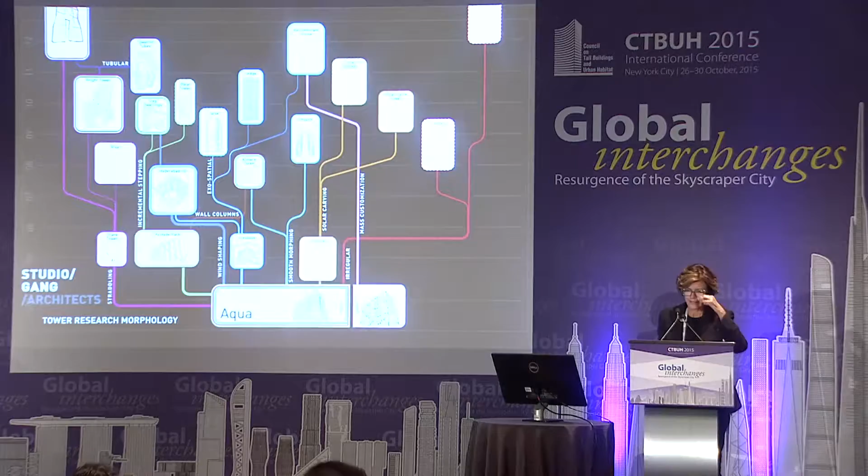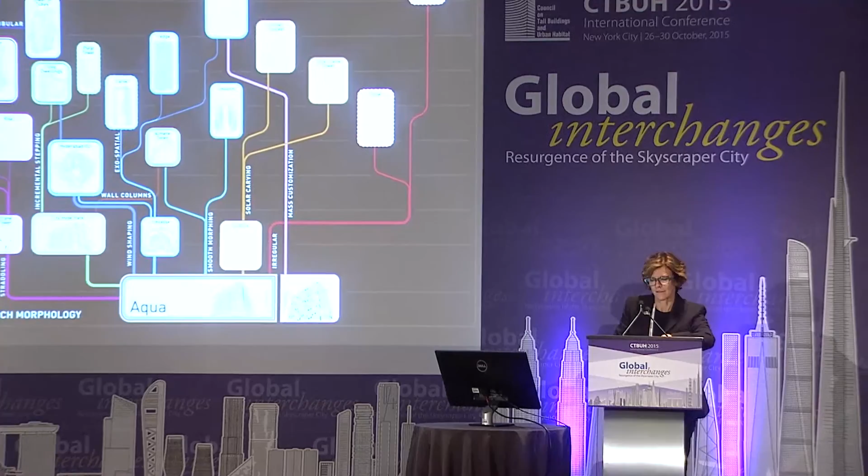Go figure, okay? So I'm Jeanne Gang. I founded Studio Gang Architects in 1997, and I've been working on tall buildings since about 2004. We've been using this human-centered approach to tall buildings, and even though, as we have learned through this conference so far, that tall buildings are more and more accepted, and they're appreciated for their iconic nature and their identity that they lend to cities, they still have some ways to go with the social connectivity.

And so I'm talking about residential buildings today, tall residential buildings. Problems continue to persist with the buildings at ground level, through the accessibility and creating community with these buildings, as well as their environmental impact.

So when we started working on tall buildings in 2004, we noticed that there were these kinds of lines of ideas that were tying our approach together. So I'm only going to talk about 3 of those today, 3 strategies for making the building more socially connected.

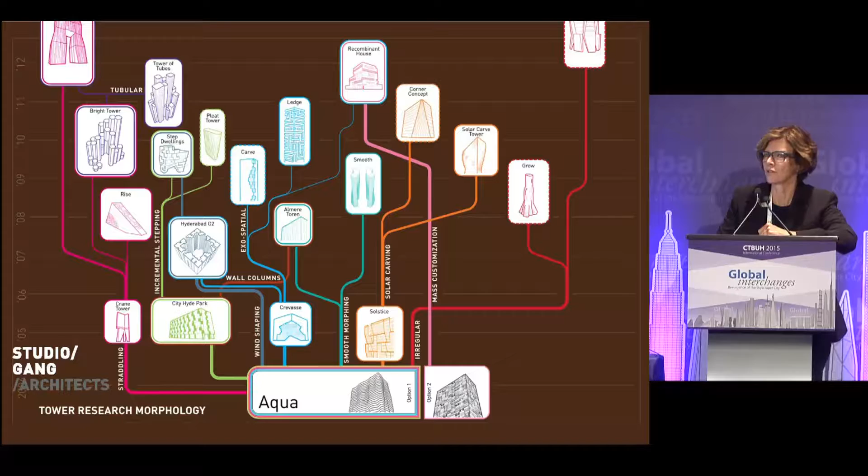The first one is called exospatial, so the living on the outside of the building. The second one is called solar carving, which is making the building respond to the urban environment around it and not just the environment of the building itself. And the third one is called bridging, or in this diagram, straddling, the idea of making space at ground level for social connectivity.

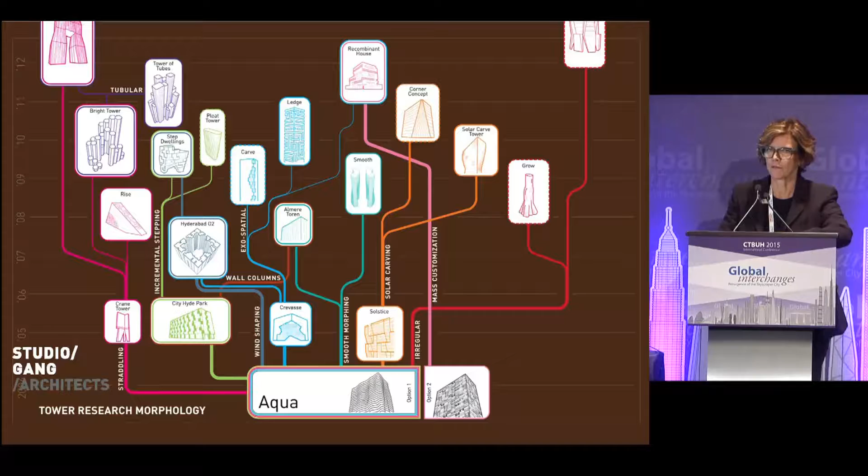Probably most people know the Aqua Tower. That is a great example of what I call exospatial design. So we're exploring here the idea of outdoor living and its potential for its social dimensions on the outside of the building. And when we first designed this building, it was very rare to have balconies as high up as 82 stories, which this building is.

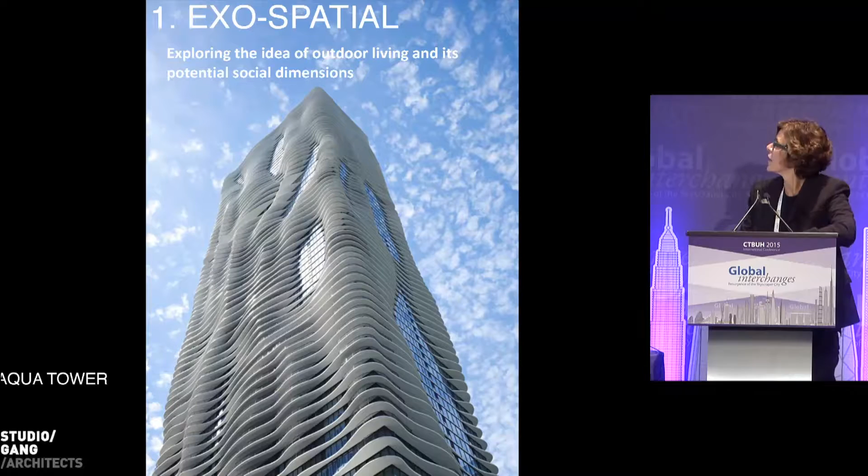It's a mixed-use building with a hotel at the ground level, and then rental apartments up till level 57, and then condominiums above that. So mixed use, and all of these 3 uses share common amenities.

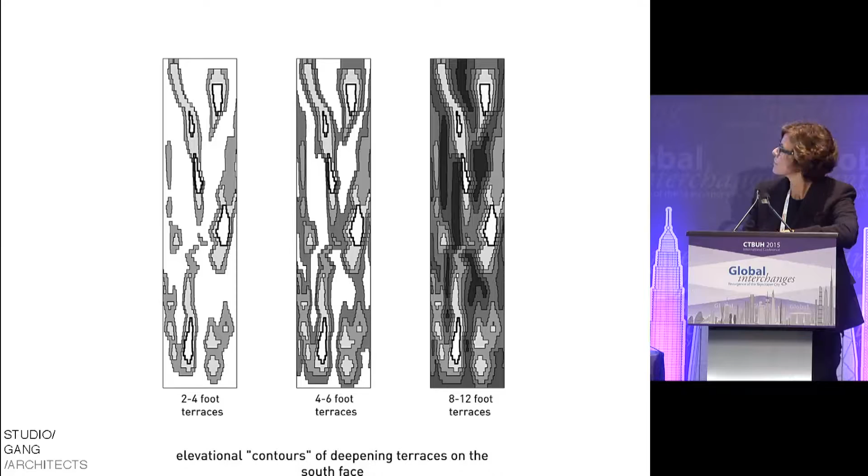But the balcony, which is the exospatial part, is based on this idea that there could be terraces, almost like a landscape of terraces on the outside of the building that have different depths, different dimensions, and they relate to different parts of the city. So every floor is slightly different in this building.

We were able to achieve this even with the construction, with a 3-day pour cycle. So it was completed in 2009, and it was probably lucky to be completed right before the downturn of the economy, but has been a huge success in Chicago and is a highly coveted place to live.

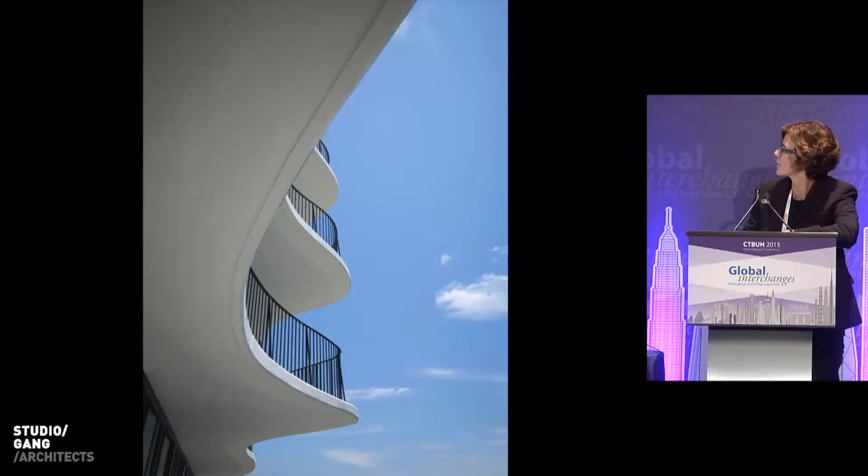The idea of the balconies really was, because the slabs are changing on every level, it's possible to see people with oblique views up and down the building and across the way. And they provide, some of the deepest terraces are 12 feet or 4 meters in depth, and they allow people to inhabit this outside space.

These balconies, because they're different shapes, also confuse the wind, and so we were able to achieve this building with MKA engineers without a mass-tuned damper. But the idea is this connectivity exists on the outside face of the building, so people are able to associate out there.

The second one is a building that we have currently under construction called City Hyde Park. And this building, again, uses the structure as its architectural motif, but also a facilitator of social connections.

The building has two faces. On the north face, which has views of the skyline in downtown, we use this alternating panel system for the columns, which allows us to have very large bay windows.

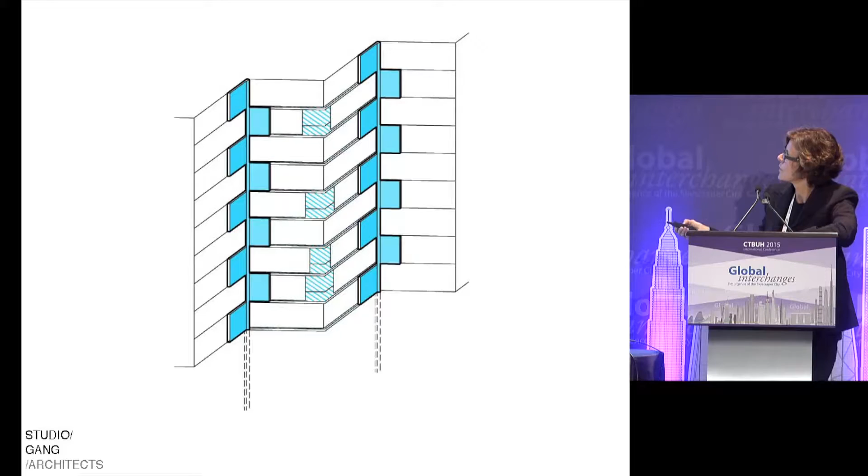And on the south side of the building, we use another system, which is a balcony concept, where the balconies come straight down to the ground, delivering the gravity loads to the ground, and tie back to the structure lightly, allowing us to have a thermal break in between the balconies and the building.

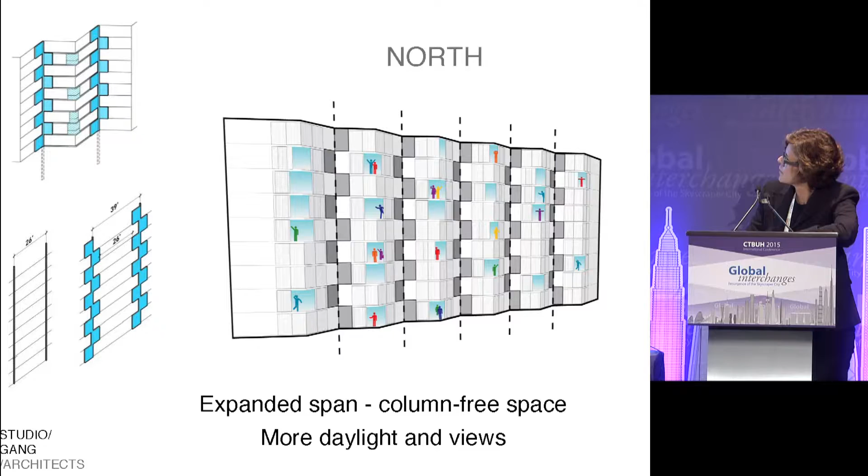So the environmental performance is improved beyond the Aqua Tower. So you can see here in the diagram the north side of the building and then the south side of the building, which has these playful, almost like a deck, a house of cards spiraling up the building so people can see each other and meet their neighbors.

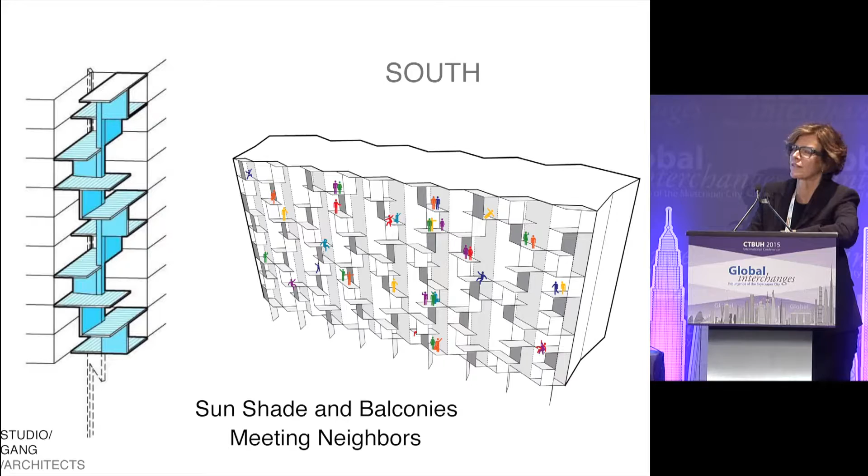So we've created a threshold on the south side of the building, which also has sun shading from these balconies and also an opportunity to meet each other. I should say that this is located in Hyde Park, south of Chicago, where the University of Chicago is located, and it's a place where a lot of students and faculty will be living, and again, this new generation desires social connectivity and community.

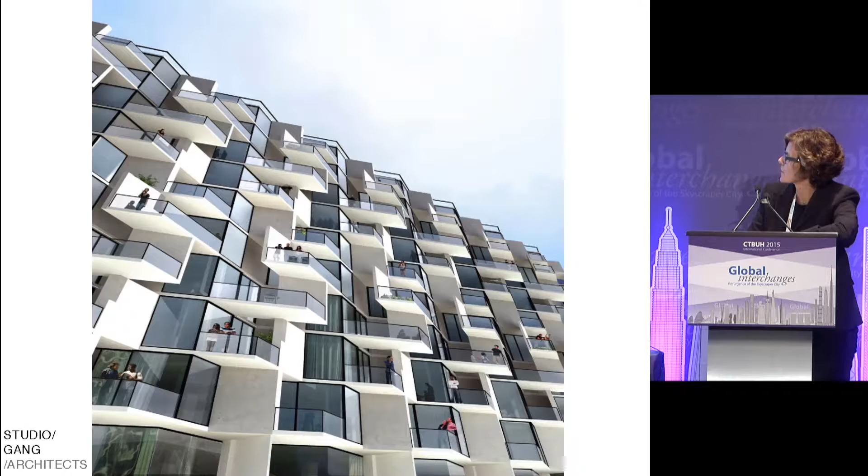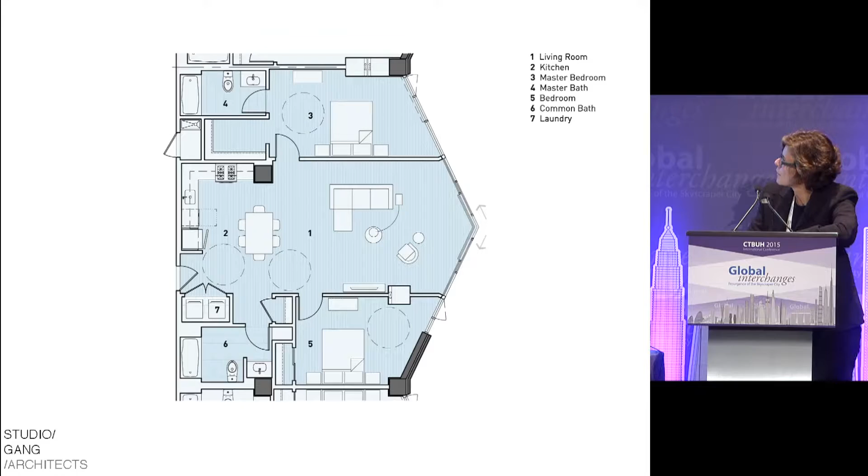Here you can see the model of the building and a rendering of how it will look on the south, and this is currently in construction. The balconies on the south, you can see there's units that have different relationships to the interior, and on the north, a big bay with a column-free bay window. So this is the rendering of how it's supposed to look when it's completed later this year.

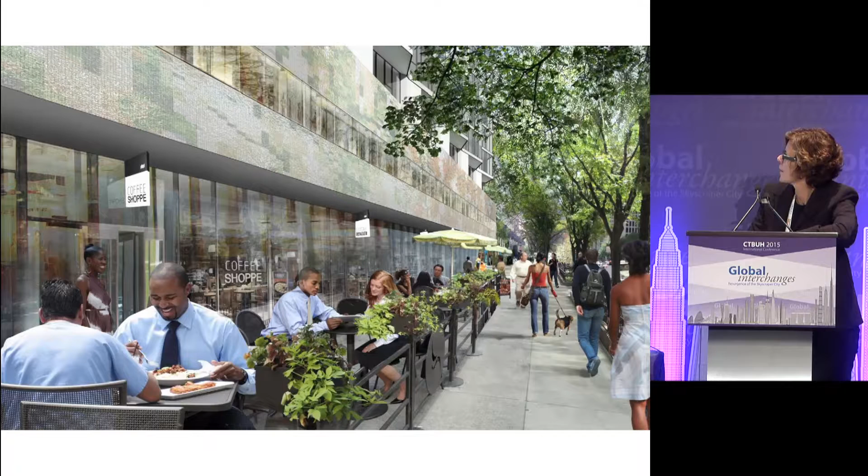This new social connectivity also extends to the ground level, where people can create, shop and meet each other, and it creates a new social hub.

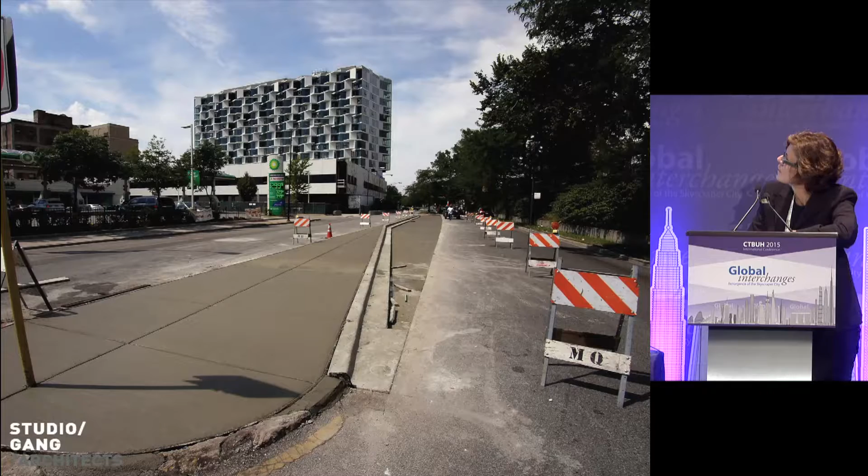So here it is looking from afar. The balconies again, and then pre-handrails where you get solar shading, but also this zone that's a threshold on the outside face of the building. We're really excited about this moving forward.

Secondly, the second strategy I want to talk about is solar carving, which the idea is one that I think you find in New York, if you think about the 1916 zoning resolution, which was created to bring light and air down to the street. That's a form of solar carving.

Also, Ralph Knowles, who was a USC professor, I've often looked at his work, where he suggests a kind of solar envelope for urban planning that would allow light and air to adjacent properties, almost like a policy proposition. For us, this idea is really about shaping the angles of the building and the facade, depending on where you are in the climate, to minimize and maximize solar benefit. So it could be either self-shading or solar access.

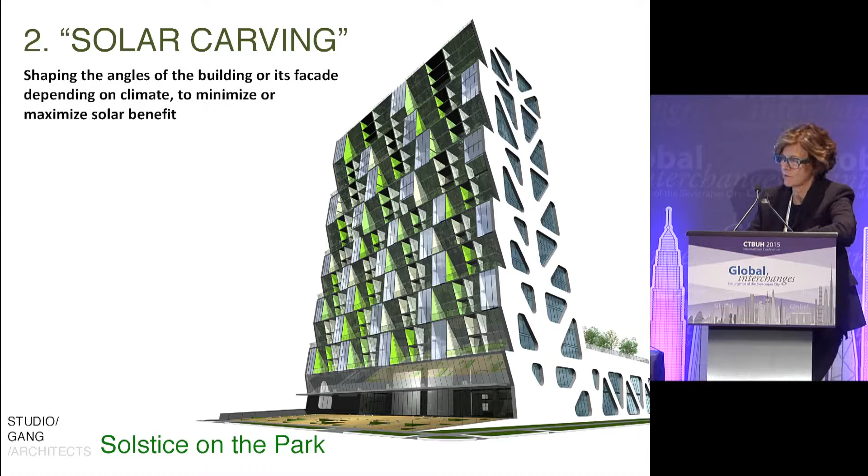So with this project, which is recently started up again, called Solstice, we tilt the facade slightly on the south-facing facade to reduce solar heat gain, but allow solar heat gain in the winter in the Chicago climate. This was the first time that we tried to really shape the building based on the solar angles.

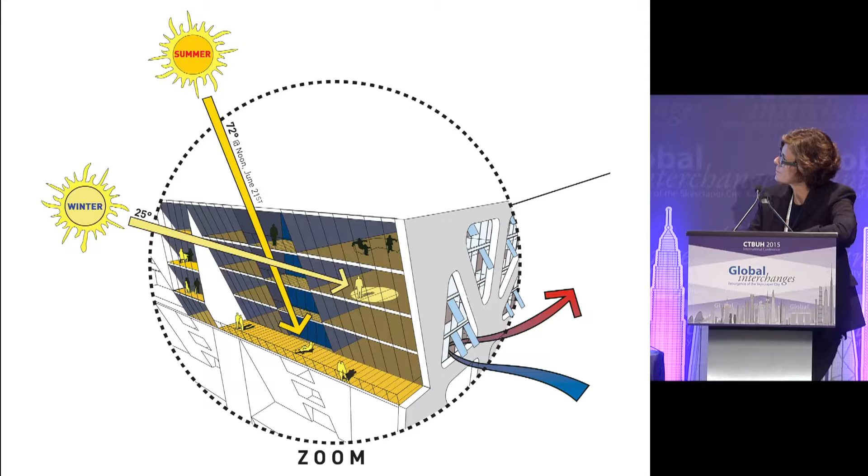As I mentioned, in New York with the zoning resolution that created the step-back skyscraper, if you look at our Solar Carve Tower on the right-hand side, you'll notice it almost looks like the opposite of that, and that's curious given the location in New York. But I'm going to explain why, because of the specifics of the site.

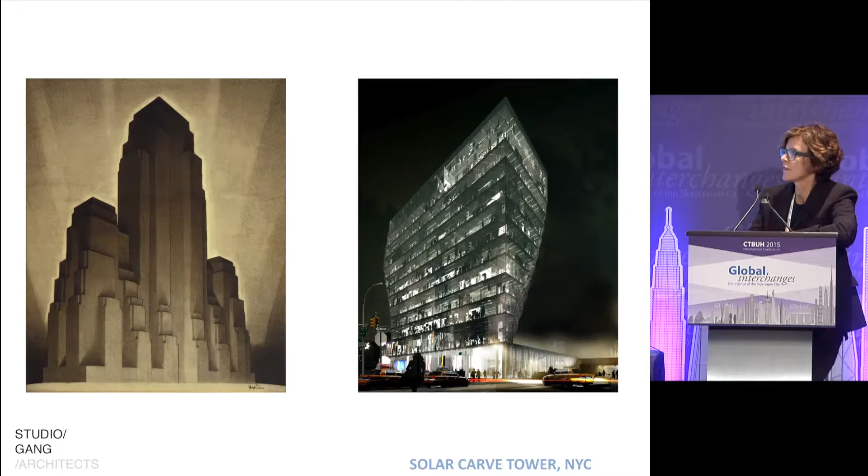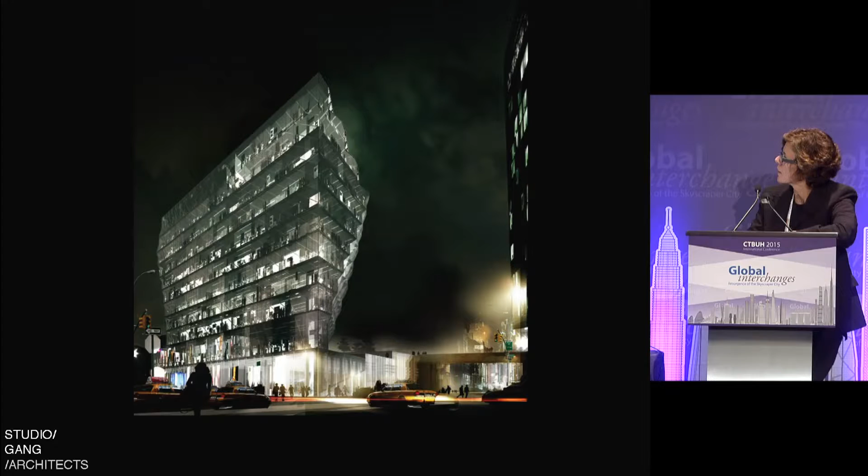And here it is again. So the larger floor plates are actually at the top on this building. You can see in this view the High Line passing by beyond the building in its current location, and a view from the High Line itself with the carving faceted facade.

So the step-back skyscraper is mostly smaller on top, but here, if we apply the solar envelope, the zoning envelope to our site, indicated in the red footprint, it would have a different kind of impact because the High Line is actually a public park, but it's located in the center of the block. It's not on the street, it's not on the sidewalk, and so it actually inverts the whole idea of the zoning envelope in a certain way.

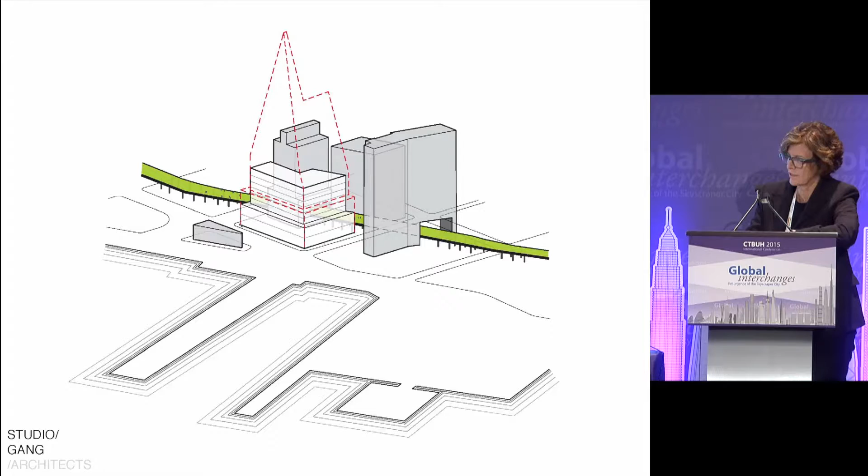So if we were to build our as-of-right building, here you can see a short, L-shaped building, it would be crowding right up to the High Line, and also blocking views from the High Line toward the Hudson River. Because our site is literally right on the edge of the island of Manhattan, the street has plenty of solar access already.

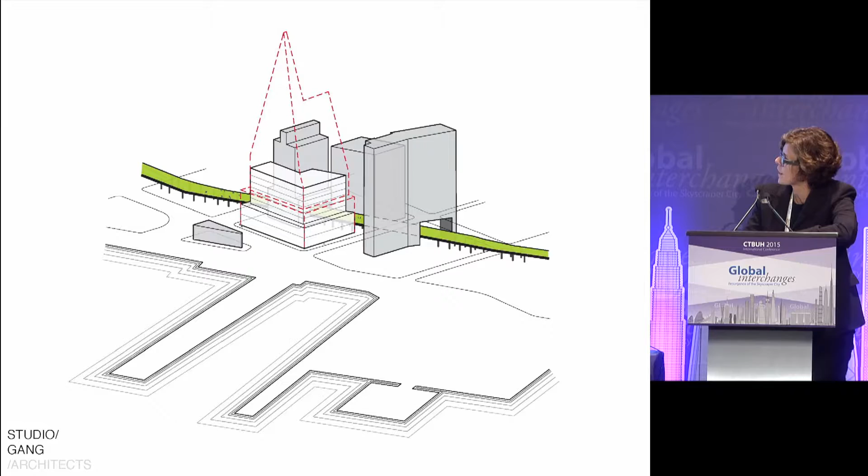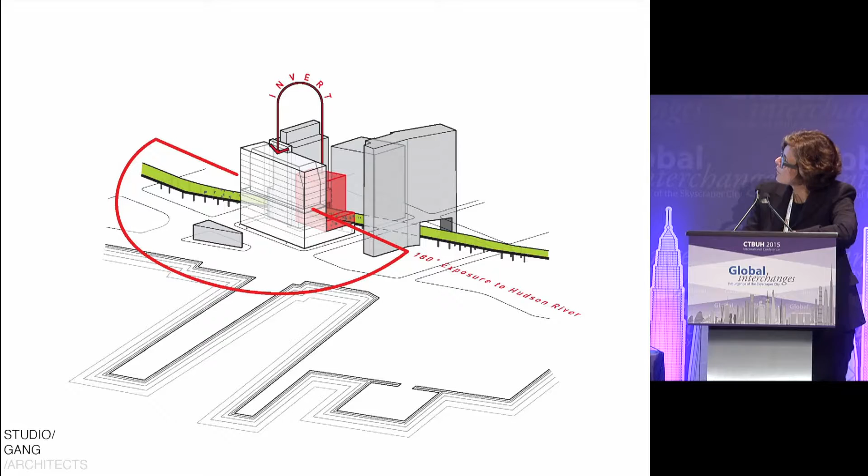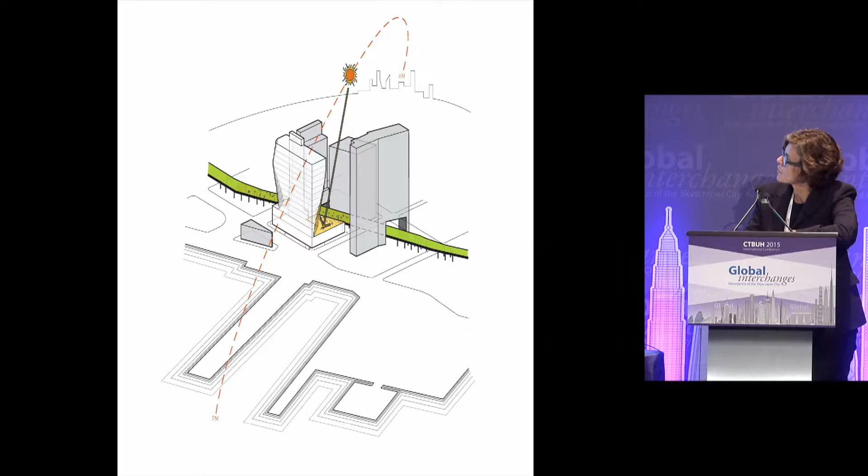We really need to think about carving the shape to benefit the High Line. So we argued for a variance to remove the red part of this diagram and put it up on top for a taller building, and then further start carving away the shape to extend views from the High Line and bring light down to the space of the High Line Gardens.

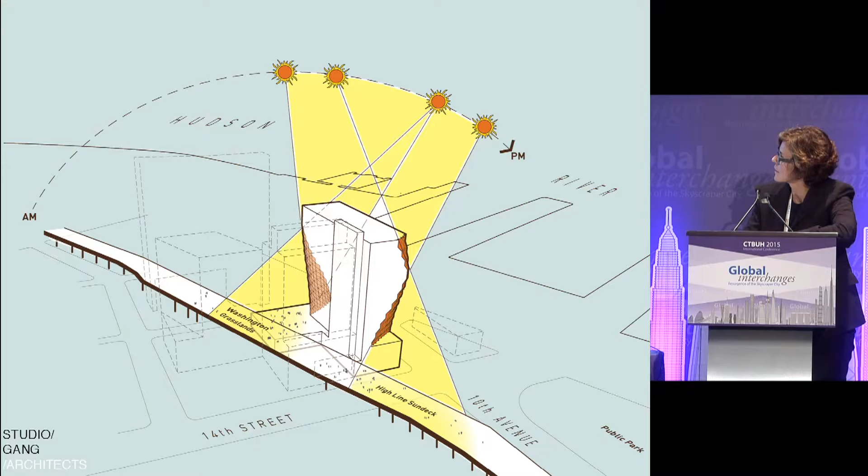So this is the strategy, and we were going after more FAR, with strategies to carve it further and further, based on the final approved FAR. We were granted this variance because it made total sense to the city, and they agreed, and we are currently underway in planning.

The final strategy for social connectivity in high-rises is a strategy I call bridging or straddling, spanning over or under urban features, including buildings and roads or axes, to make urban connections for people on the ground. One of the biggest critiques of tall buildings is that they are foreboding at the ground level, creating large bases that people have to walk way around. Maybe not so much in New York, but in a lot of different contexts, this is happening.

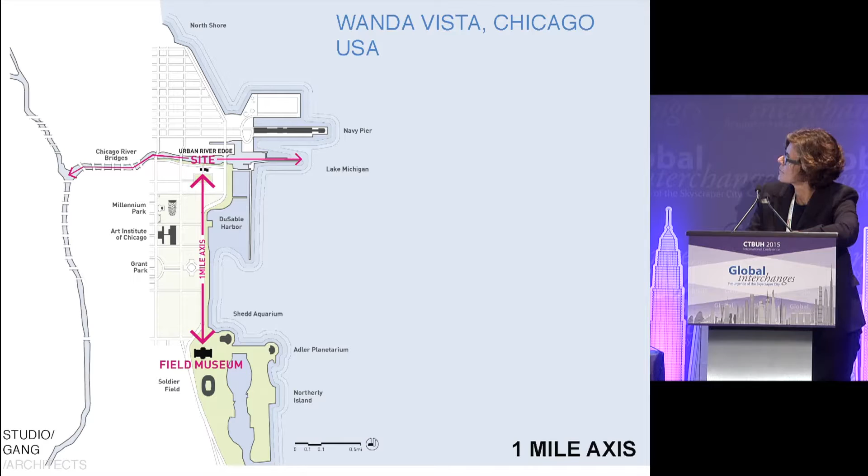This building is located along an important axis, standing there in Chicago along Lakeshore Drive. This is the axis, the one-mile axis from the Field Museum going straight north. There's a clear view of this building, and it was an axis created by the presence of Lakeshore Drive. The building also relates to its site along the river, where there's a wall of buildings, an urban wall along the Chicago River. So it's taking part in both of these aspects of the site.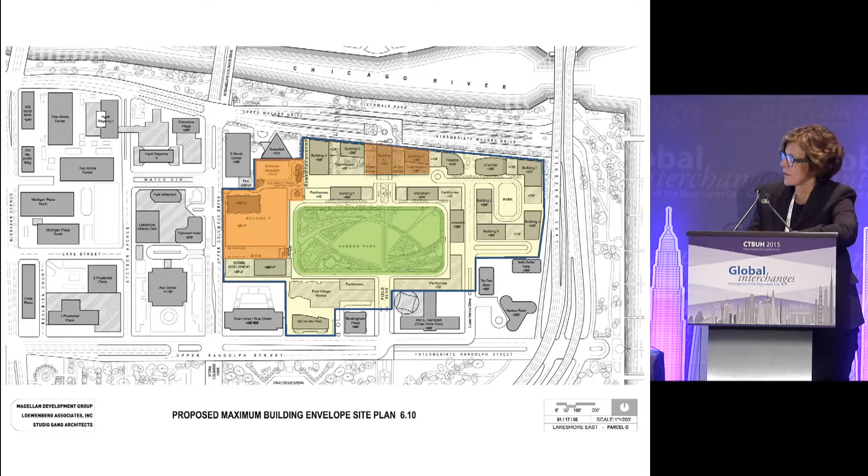On the north part, the small rectangle is our new site with Magellan, and again with Magnusson Klemencic engineers. This is the one located on the 1 mile axis. The park was built first, and that was a very good amenity for the whole neighborhood. It has become a really beloved space, and they keep adding more commercial and residential space around this park.

You can see in the plan here with north up, the axis I was talking about zoomed in, and the Chicago River on the north edge. There's a very wide roadway on the north of this site, and we need to navigate and cross over and under this roadway to connect people between the Lakeshore East Park and the Riverfront Walk.

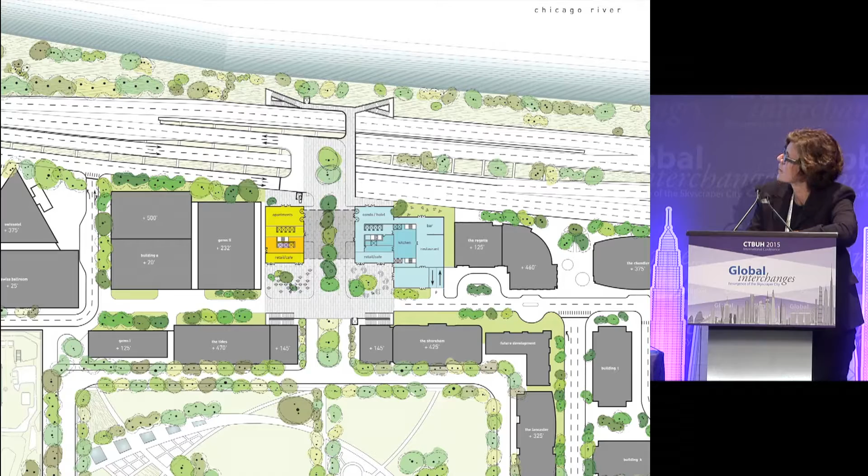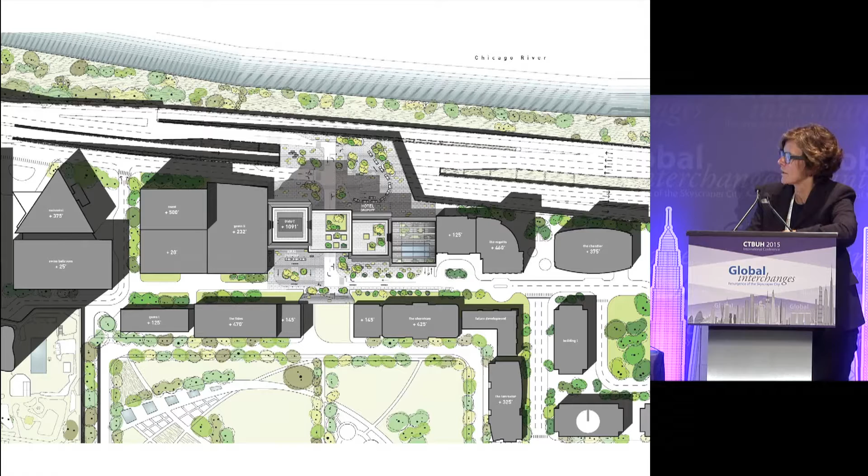Here you can see the park below, the Lakeshore East Park, and the diagram of the buildings adjacent to our new building. This is, by the way, a building called the Wanda Vista Tower. It's financed by the Chinese development firm called Wanda, and the tower will be called Vista. It's a hotel and residential tower located in Chicago.

This is a look at the elevated roadway that we have to pass, so the idea of bridging under, over, and around to allow pedestrians to move through this space became a really important feature of the design strategy.

The building consists of 3 stems, and you can see that the outer 2 stems allow the central stem to lift up, taking a lot of the structural load on the outer stems. This allows the inner stem to be structurally light, and it can be passed through on both the upper level of roadway and at the Riverwalk level.

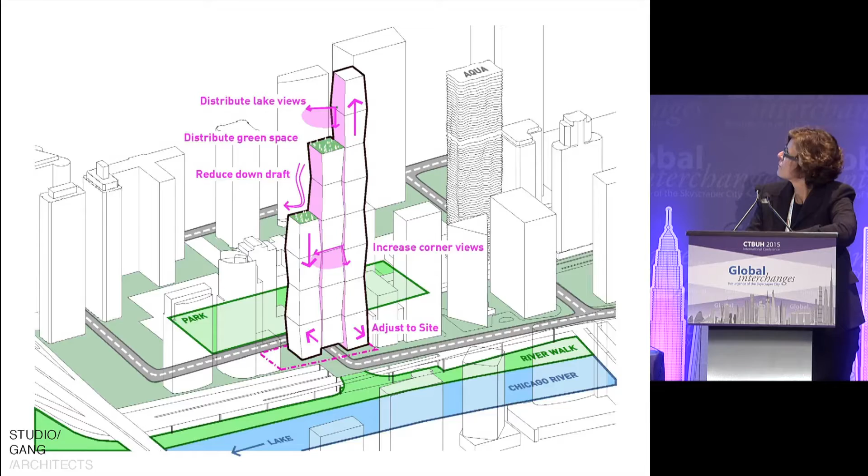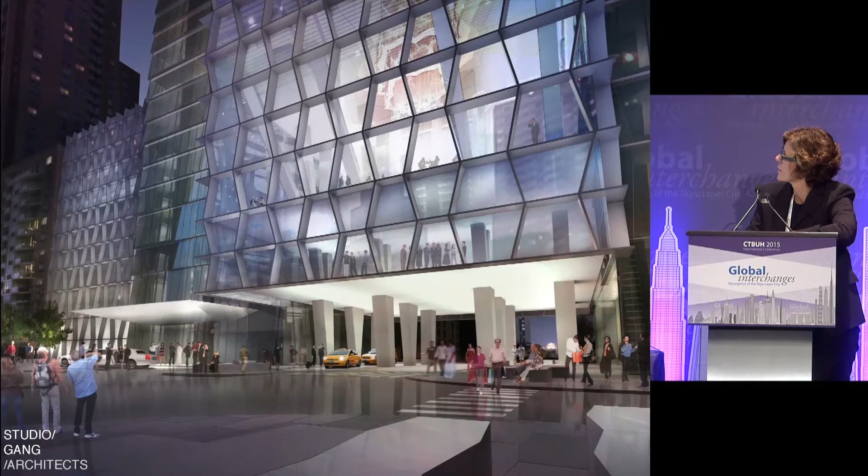So these 3 stems are lifted, as you can see here in the zoom, and this allows this connectivity, this urban connection, and social dimension to the building. This is what it looks like - you can see very little structure coming down. The heavy lifting is done by the outer 2 stems, and this is on the upper level where there'll be sidewalks and drop off for the hotel and connection through to that 1 mile axis.

Here it is in section. As you can see, it's a long walk on the lower level, about 600 feet to make that connection, which we are doing also with illuminated walkways and connectivity, and on the upper level with garden areas and illumination.

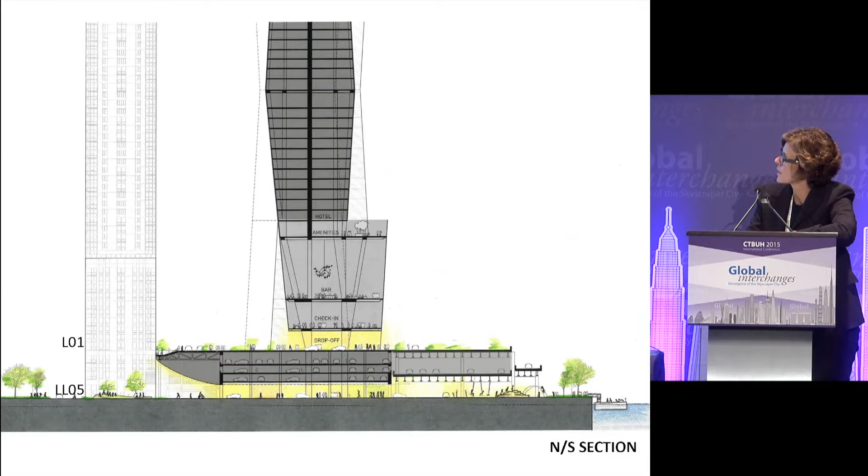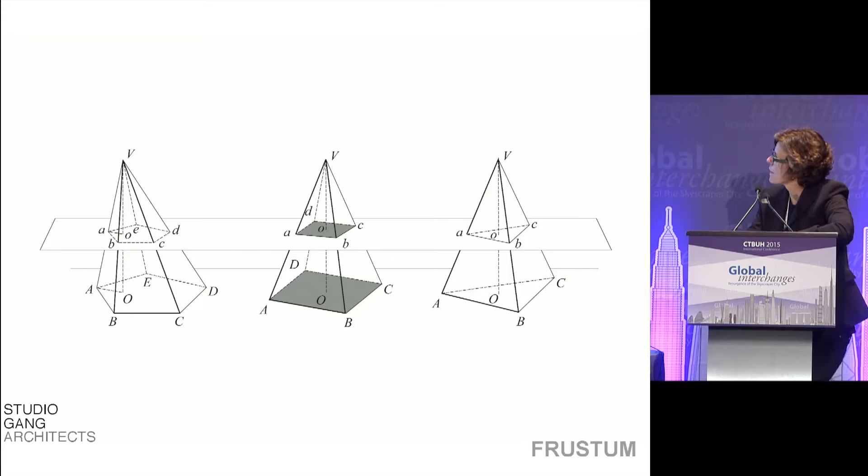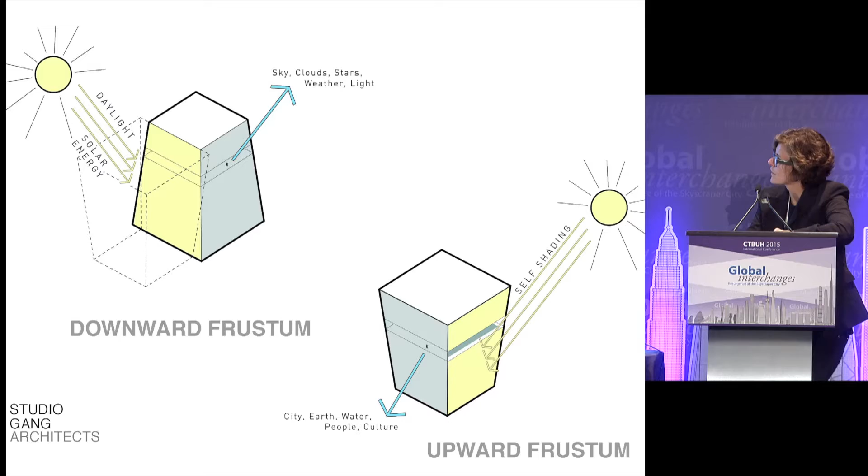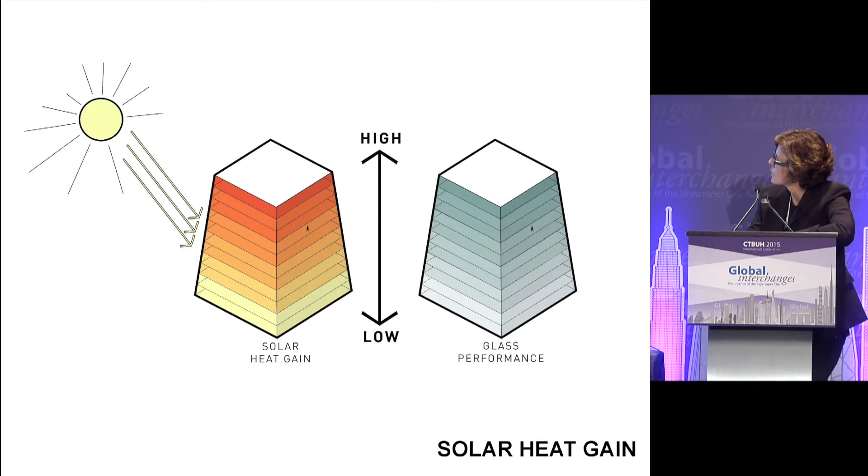This is a little model that we had to explain the issue to the city and to the client. The overall design of the building is based on frustum geometry, which is a truncated pyramid. This allows us to create difference within the building, both upward facing slopes and downward facing slopes toward the city. Then with the glass performance, we're needing higher performing glazing on the smaller footprints, and we can go more clear with the larger footprints, so that creates a kind of gradation.

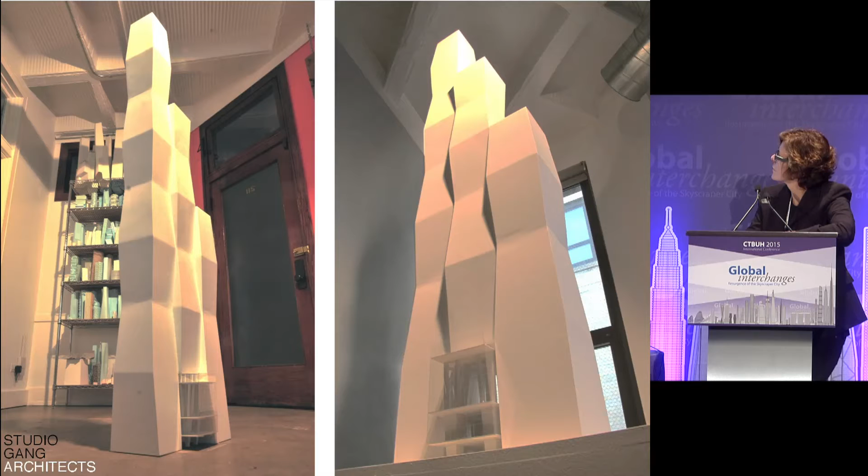These are different studies of the building and iterations. This is a model we made in our office that represents the scale - it's about as tall as the room, but it gave us a very good sense of the in and out. We're creating more corners, so instead of 4 corners, the building that connects on every level has 8 corners for the units.

This shows a little bit more of the gradation of the color of the facade, and here you can see it along the river. Most importantly, I think the base of this building is doing something that is quite rare in terms of tall building design, which is really creating a connection for people at its base.